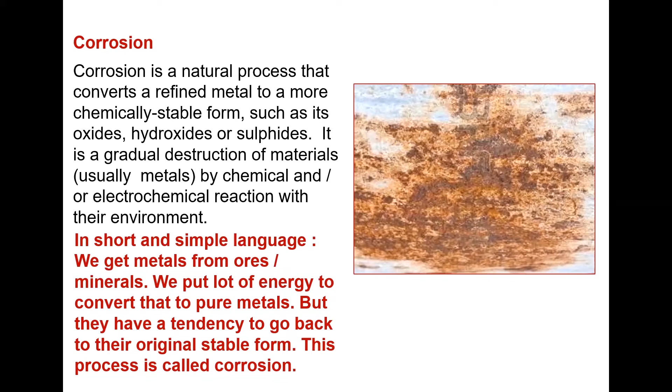We are putting a lot of energy onto it, heat or whatever, and converting that to pure metals. But they do not have a tendency to stay there. They have a tendency to go back to their original form, which is a stable form, which is ore. So oxides or sulfides, nitrides, hydroxides, whatever. And this process of going back is usually what we call corrosion.

Losses due to corrosion, you can see these pictures. These are not only material loss. It could be a structural strength loss or other losses. And some studies have estimated that as much as 4 to 6% of GDP of the country we are losing because of metal corrosion.

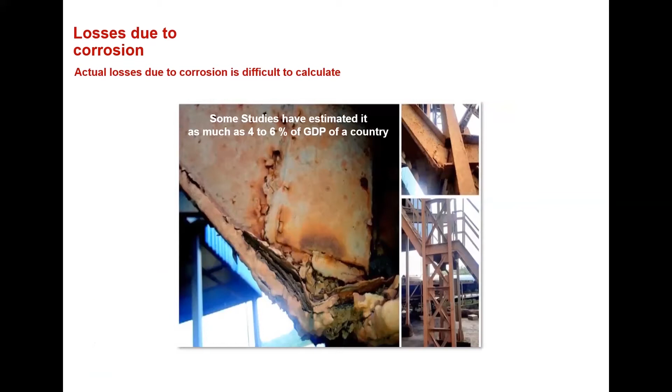Normally, as we come to automobiles or even appliances like refrigerators, washing machines, etc., their main corrosion is cosmetic corrosion. Cosmetic corrosion starts on the exterior surface of the automobile or a lot of other things also, in railways also, etc. Due to localized damage of the paint film, paint or powder coating film. Whenever we are talking about paint film or powder coating film, the meaning remains the same. The bare metal is exposed to the environment.

This affects the aesthetics of the visible exterior painted surface due to red rust and stains, that is, lateral spreading under the paint film resulting in undercutting. That is what we call creepage. Creepage means the corrosion or rust moving between the paint film and the bottom material. That is what we call the substrate.

So you can see here, this is the end result, but it has started, maybe there are some cuts here, and the corrosion has started going in. And because of this we are getting these bubbles, we call them blisters. Below this, most of the metal is corroded. So likewise it goes. That is what we call creepage. The word creepage you will always be familiar with in case of salt spray results.

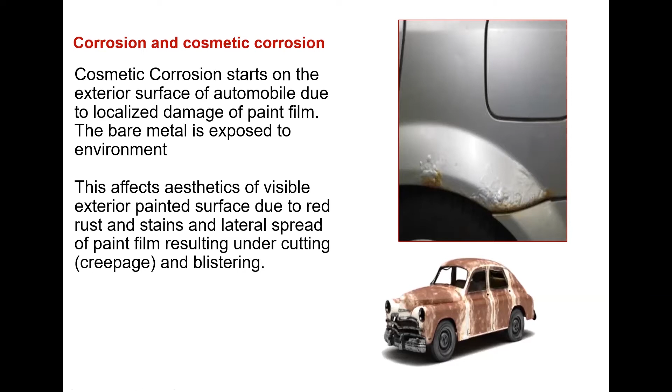Perforation corrosion. Perforation corrosion will lead to serious structural damage. It remains undetected until it becomes visible on the exterior surface. Normally what happens is this perforation, what you have seen here, has started from inside. Most of the time, maybe the paint film was quite intact, but the metal was rusted. Strength had gone, and one fine day, that paint film also cracked along with the remaining corroded metal parts.

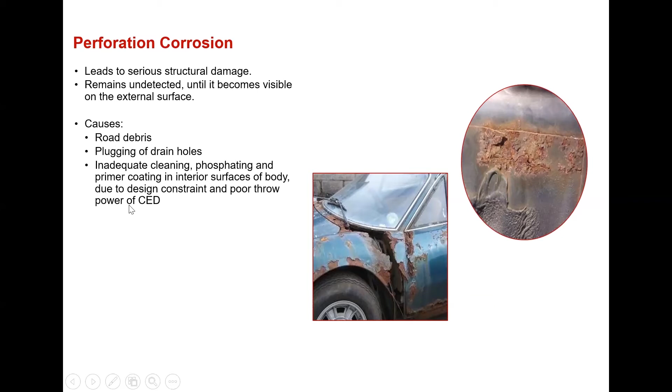This can happen because of road debris, plugging of drain holes, inadequate cleaning, phosphating, or primer coating in interior surfaces of the body. Due to design constraints, there's something called throw power in CED. CED is cathodic electrodeposition. So poor throw power of CED.

General rules of corrosion, when metal is in contact with its immediate atmosphere: moist air is more corrosive than dry air. Hot air is more corrosive than cold air. Hot water is more corrosive than cold water. Polluted air is more corrosive than clean air. Acids are more corrosive than bases or alkalis. Salt water is more corrosive than fresh water. So these are general rules of corrosion.

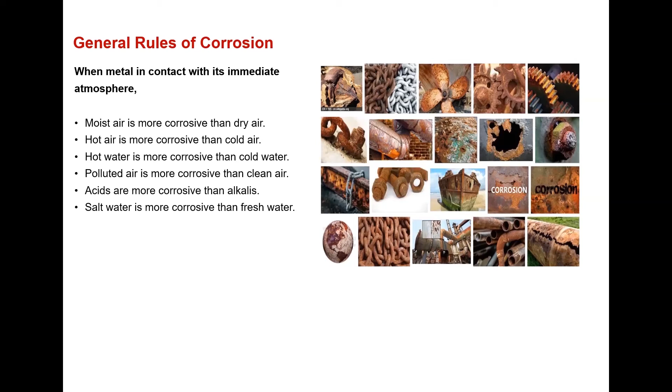Now, how can we control corrosion? Ways of controlling corrosion. We can protect our assets by use of more corrosion-resistant materials, which is not always possible, because you can't make a car in stainless steel or something. They have already started making some expensive cars in aluminum, but that is, I think, not from the corrosion point of view. That is from the strength and weight point of view. It reduces a lot of weight. That is why they've gone for aluminum cars. But making cars out of corrosion-resistant material like stainless steel will be impossible.

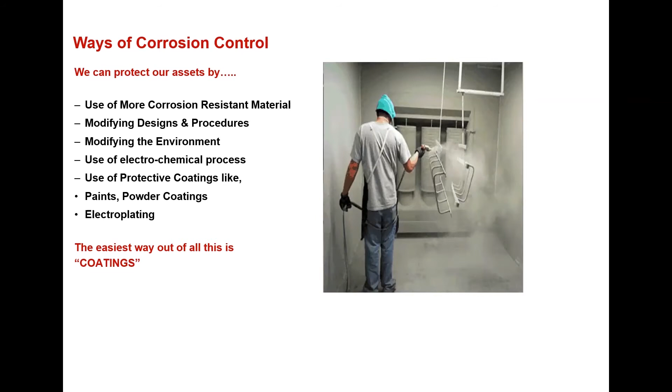Modifying design and procedures, not always possible. To a certain extent, yes, you can do that. Modifying the environment is utterly impossible. You cannot do that. Using protective coatings like paints, powder coatings, electroplating, etc. So the easiest way out of all this is coating. Put a coating on it. Now, when we are putting a coating on it, that doesn't stop the corrosion. It will only delay the corrosion reaction.

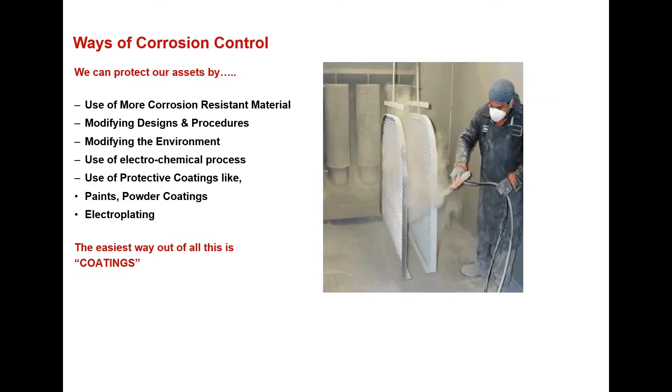Now, in this, powder coating is a simple process of applying a thin, uniform, cured coating which protects the metal surface from environmental attacks. Now, marine, I have specifically shown one GIF on the right. This kind of salt water goes into the ships. This is, of course, a smaller ship, not a big ship. Big ships don't do this. So you must be knowing what kind of corrosion can happen there.

There are a variety of industries who are using powder coating. It could be automobiles, architectural, valves, your cupboards, refrigerators, washing machines, automobile industry, engineering industry, you can say control panels like Kalpesh was speaking about. So all these are now powder coated.

Powder coating evolved some 50 years back, rather evolved in the 1950s, but came to actual industry usage by 1970s, '75, something like that. And after that, it has replaced a lot of liquid painting with powder coating, because there are certain advantages of powder coating which we will be discussing.

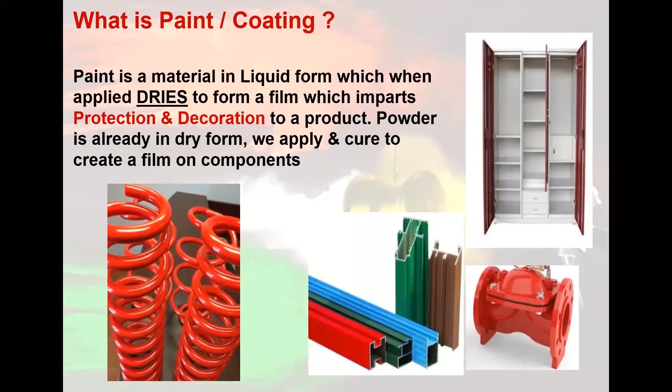Now, composition of powder, what goes into the powder. Coating powder is a homogeneous mixture of heterogeneous materials. Now you have resins, you have pigments, you have additives. Now these resins are basically the polymers, which we were just talking about, like polyester, epoxies, epoxy polyesters, etc. Pigments are the colored powders which we are adding into that, and additives will add some special property.

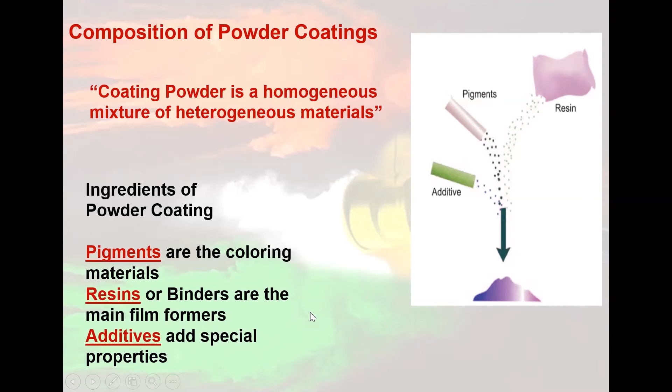Now there are two technologies in the coating industry. One is liquid coating technology, which we call wet technology. It has been in existence for more than 2 centuries or maybe more than that. The powder coating technology has been in existence for just about 50 odd years. In these two technologies, powder coating application is much simpler than liquid paint application.

Now, the advantages, somebody was asking what are the advantages over liquid. One is powder is ready to use. There is no viscosity adjustment, no hardener to be added, etc. The application method is much easier. It's a single coat system. Variety of finishes like texture, structure, these finishes would be available without any additional skills of the coater.

Of course, the coater will need good skill to do texture or structure finish, because if the DFT varies, the structure finish also varies. So there the skill matters, but similar kinds of finishes in liquid are not all available. But if you want to do these finishes in liquid, naturally the coater's skill plays a very important role.

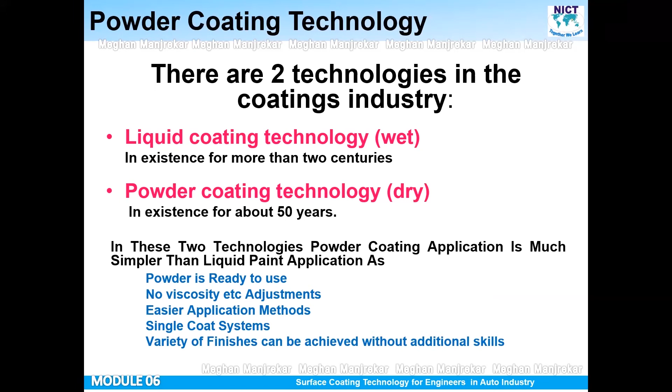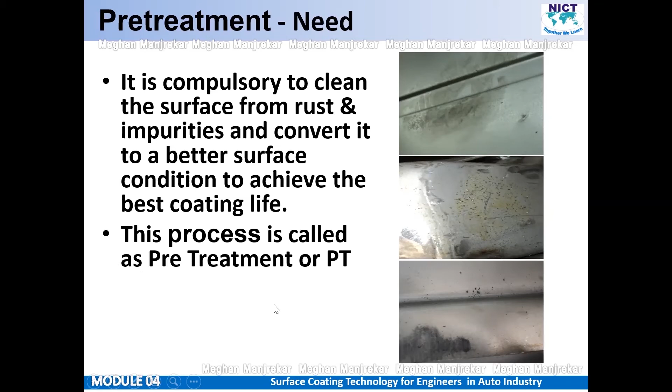Even the automation and movement, material handling, all these things will change with the demand, basically. Volumes, frequency of coating, how many square feet you are coating every day. All these things will decide the type of material handling, automation, ease of material handling, all these things.

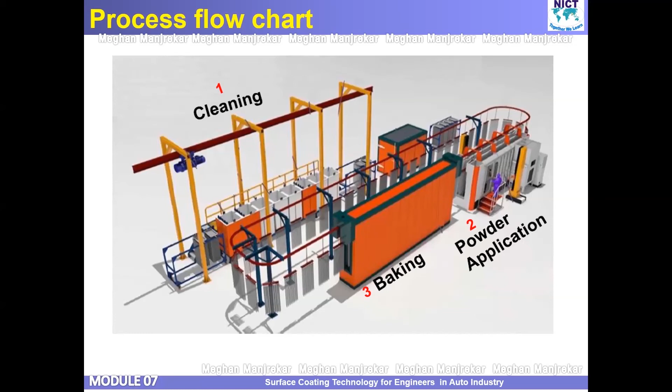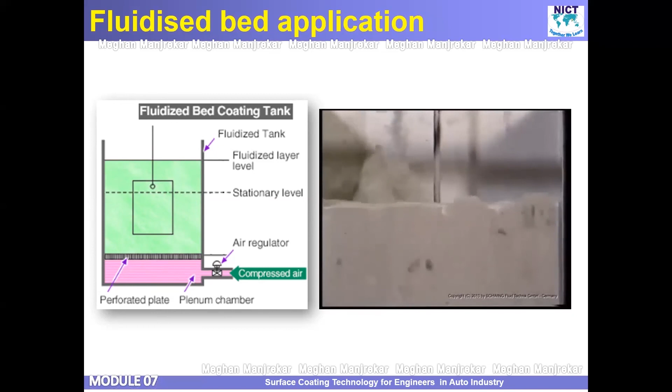Now, the disadvantages are you don't have any control. At the bottom, the amount of powder particles is higher compared to the top. So DFT variations will be there. Job to job temperature variation: suppose I put one at 155 degrees, second at 150 degrees, third at 145 degrees. The melting and deposition will vary. So job to job variation in DFT is also expected.

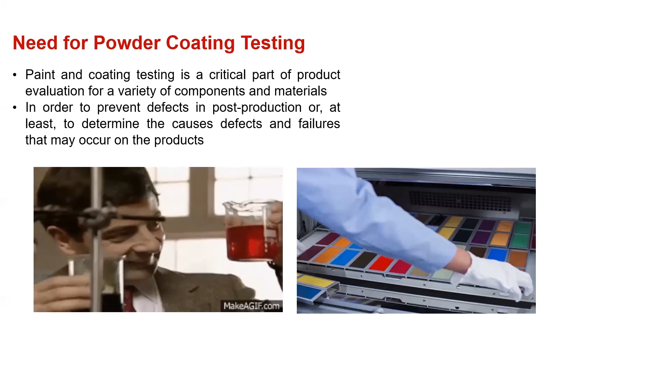So basically, powder coating testing is a critical part of product evaluation. So naturally, you need to do it on a regular basis. There are four different types of tests. Mechanical strength tests, which include scratch hardness, impact, flexibility, hardness, adhesion, and curing degree. This is mainly what we are doing at the application end. Aesthetic appearance tests: DFT, gloss, color, hiding, DOI, in which DFT and gloss we normally check here, and color sometimes, if you are doubtful.

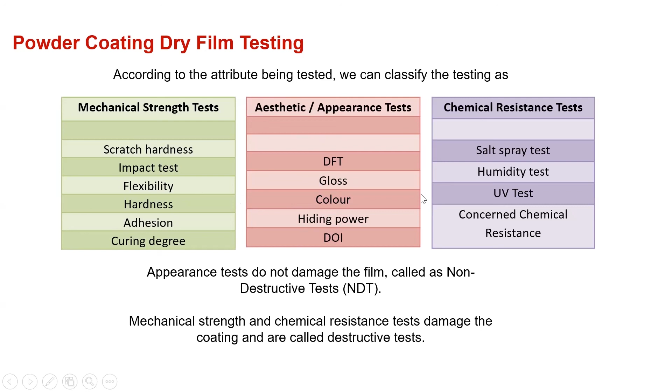Chemical resistance or corrosion resistance: salt spray, humidity, ultraviolet test, concerned chemical resistance test. Now, these appearance tests usually do not damage the coating. So we call them NDT, non-destructive, and the rest are usually destructive tests.